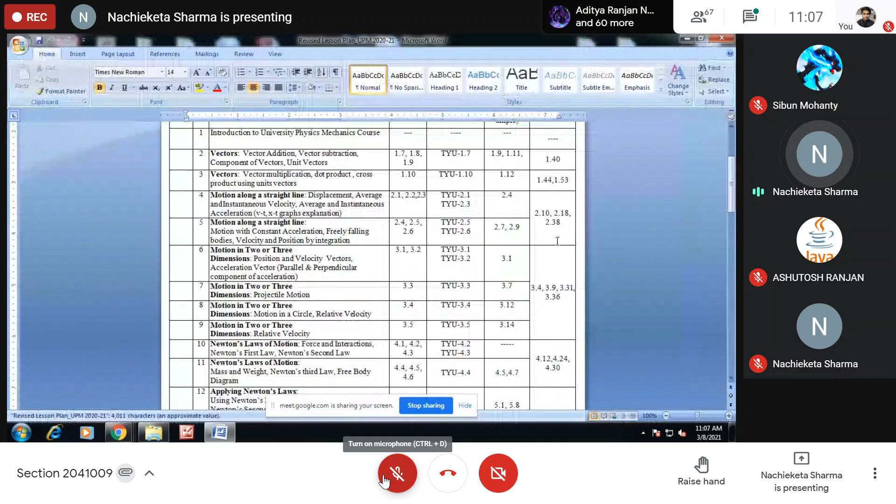Sir, we were at rotation of rigid body and doing a cylinder problem. Which cylinder problem? Example 9.8, sir, chapter 9. So we are still in 9.8. Just wait, let me see what is there in this chapter. This is a revised lesson plan, but this plan has again been revised. 9.8 we have covered. Then 9.11, 9.40, 9.59 are assignment exercises. So I think chapter 9 is over and we can start from chapter 10. Is it okay?

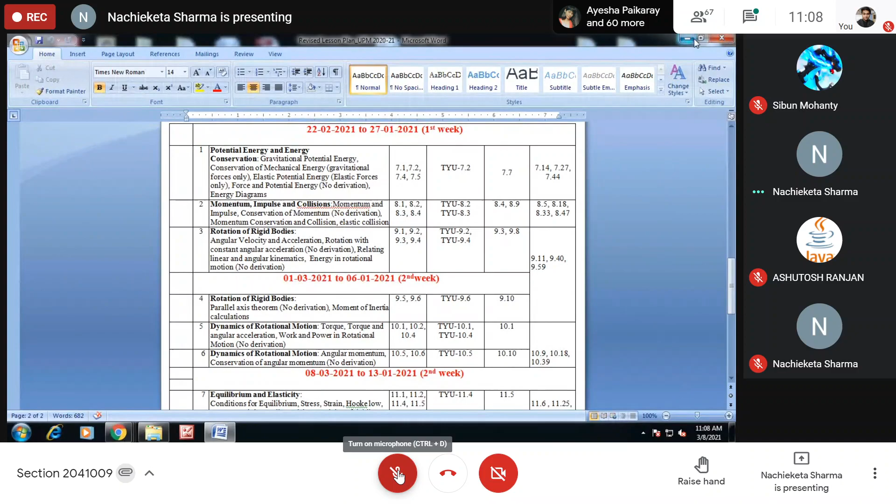Am I audible? Yes, sir. Okay. So we will start from chapter 10. Straight away we will do the problems, that will be better. So first let me do example 10.1.

Chapters 10, 11, 12, 13, 14, 15. But the 11th chapter will hardly take 10 minutes, a very small chapter. 13 is a big chapter; otherwise all chapters are very small, and they have truncated many parts. So you need not worry about all these assignment exercise solutions. And most important, the examination pattern is MCQ type, so there will not be any problem. So example 10.1, let us start immediately so that we can go quickly.

Example 10.1. I am reading out the question. How are you going to find the torque? Torque is responsible for rotation of a body. There is some kind of piston like this that can rotate from here. This point is normally known as the fulcrum, or a hinge, and this is your horizontal. With the horizontal it makes an angle of 19 degrees, and the length from this point to this point is 0.80 meter.

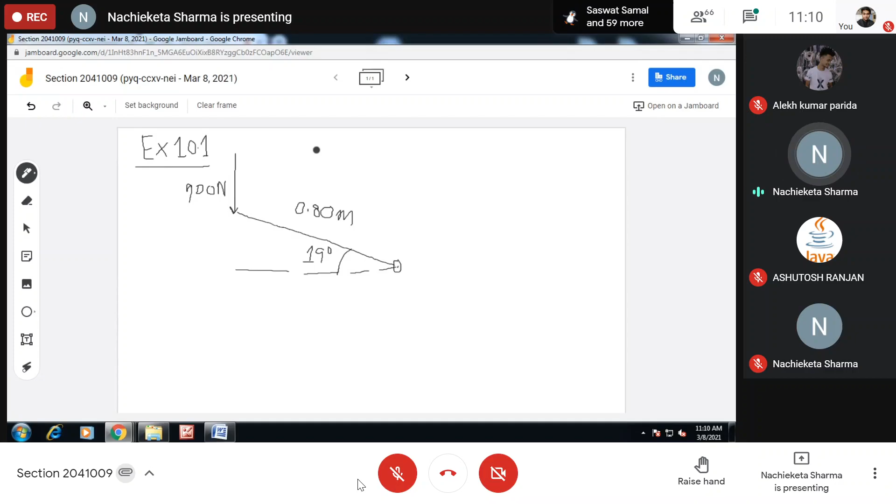Torque is a vector quantity. It is represented by a Greek symbol which is pronounced as tau. So this tau is equal to R cross F. How are you going to find out this R cross F? That means it has a magnitude and it has a direction. The direction is governed by the right hand thumb rule, as it is governed by the cross product of two vectors.

And its magnitude is tau equal to RF sine phi. R is the magnitude of the position vector, F is the magnitude of the force, and sine of the angle between vector R and vector F. So this angle is phi. I am writing it like this. So now how to find out phi? That is a very important task.

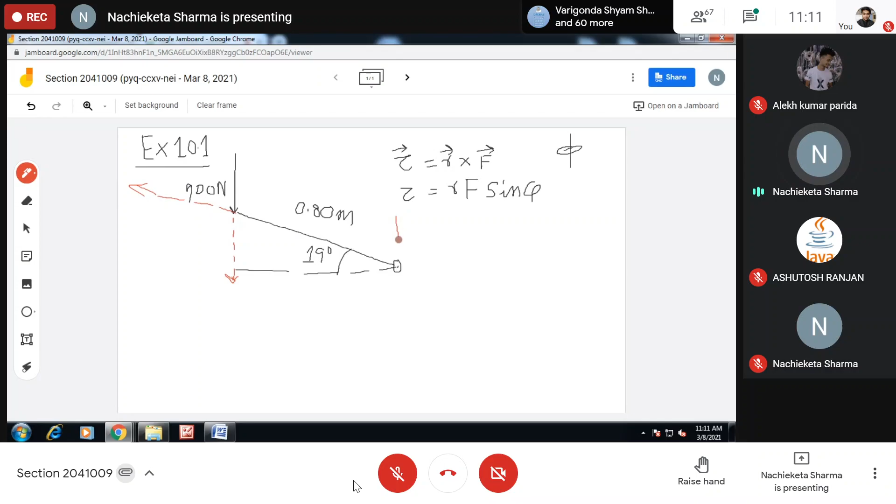So what you are going to do, you just extend this line of force in this direction, and you can extend this R in this direction. So this becomes the direction of R. This becomes the direction of your F, and you can choose your origin here as the fulcrum. So this becomes your x-axis, this becomes your y-axis, and the fulcrum becomes your origin O. Now you see this angle is your phi. So 19 degree is not your phi.

So phi will be how much? This angle is 90 degree. So this angle will be 71 degree. So 180 degree minus 71 degree is 109 degree. So this phi is equal to 109 degree. So how are you going to find out its magnitude? In place of R, you will write 0.8. So 0.8, I have written it as 8 by 10. Magnitude of F is 900 Newton.

So into 900, and then sine 109 degree is sine of 90 degree plus 19 degree, which is equal to cos 19 degree. So I will find out the value of cos 19 degree. If I do the mathematics, this zero gets cancelled, then 720 into cos 19 degree, which will give you a value of 680, and the unit is Newton meter, because sine phi doesn't have a unit. R is meter, F is Newton. So 680 Newton meter is the magnitude of your torque about this point, because once this point changes, the torque's magnitude will also change. This is one way of finding.

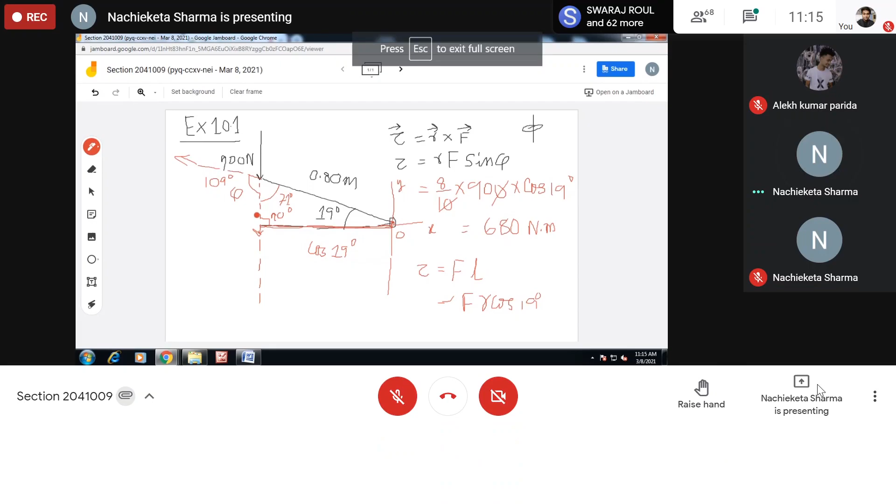So this is example 10.1. Now immediately we'll go to another. If you have understood this example, then immediately we can do a test your understanding, and I will test whether you have understood it or not just by drawing a diagram. These will be asked as multiple choice type questions, because these are small questions and have the potential... Test your understanding 10.1.

So test your understanding 10.1. So what is 10.1? Again, there is a kind of thing like this. This is the point of rotation. This angle is again given with the horizontal, which is theta, and this length from this fulcrum or point of rotation to the point of application of the force is L, and this value is P. This is capital P, the magnitude of the force, and this is the direction of the force, how it is applied. And you have to find out the magnitude of the torque.

Okay, and there are 4 options, and I will be reading out the options and you have to just tell me. So the figure shows a force P being applied to one end of a lever of length L. This length, as I mentioned, is L. What is the magnitude of the torque of this force about point A? This is point A. What are the options? A, PL sin theta. B, PL cos theta. C, PL tan theta. D, PL. Yes, tell me.

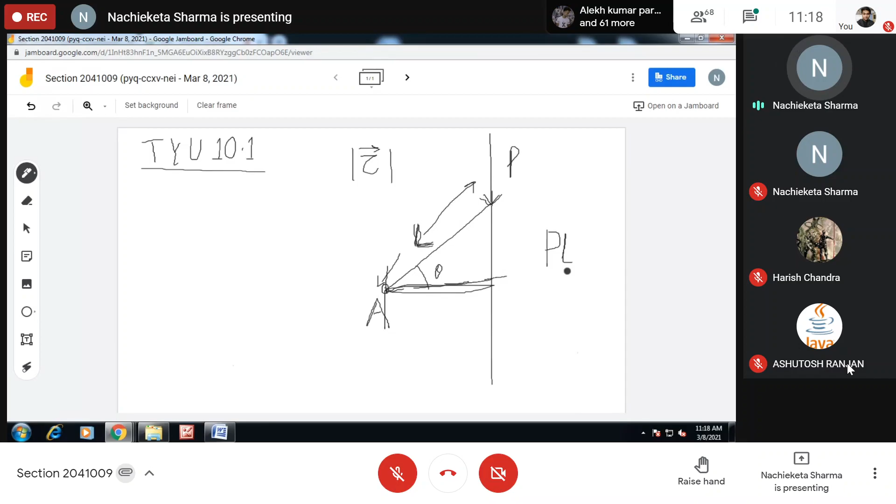Or you can also do it in a different way. You can extend this direction. So this becomes your phi, this angle, and this phi is nothing but 90 degree plus theta, and sine of 90 degree plus theta is cos theta. So again you get PL cos theta. In whatever way you do it, you will find the same magnitude. So you are correct. So that is test your understanding 10.1.

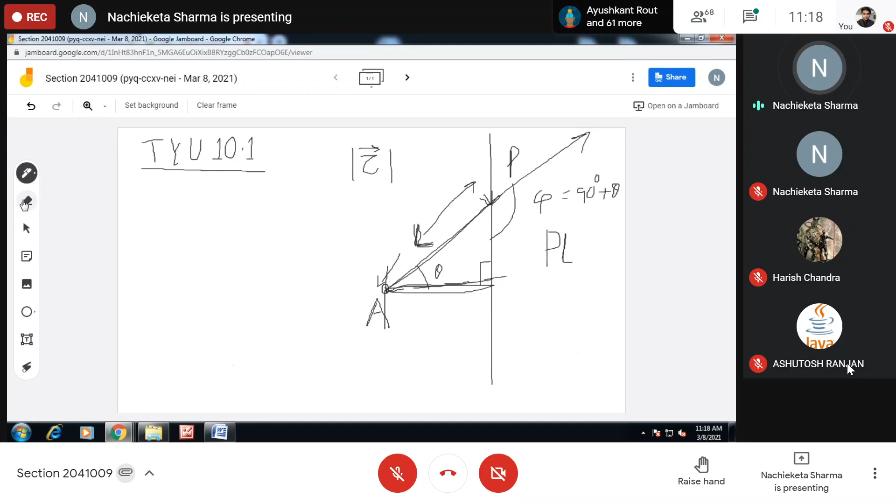Okay, now we'll go to another example, which will also explain another concept. Once I do it, you can understand. That is example 10.5. So you just look at the things. Just wait. Example 10.5, let me draw the diagram first.

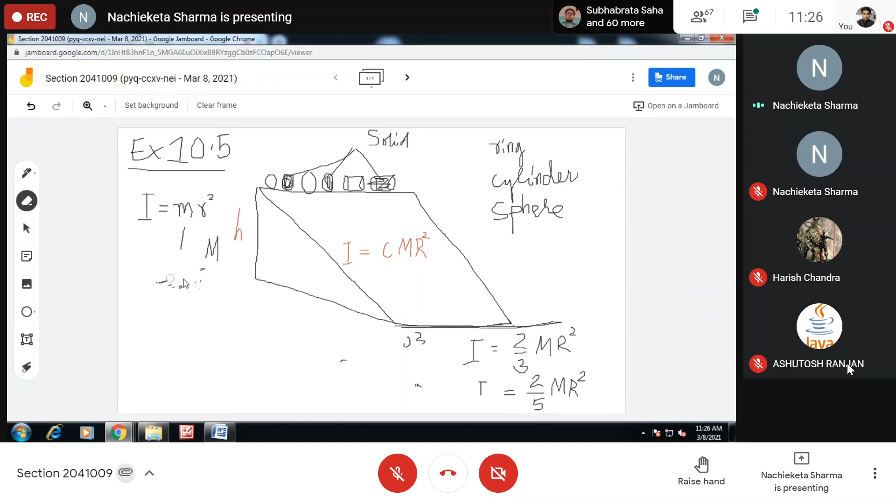Can you guess and tell me, so that we will test whether your guess is right or wrong? Now tell me, did you listen to the question, what I was telling? Yes, anybody, Ashutosh or anyone? Sir, all solid cylinders have the same shape. No, my point is that, can you guess which object will reach the ground? Your guess may be wrong or right, that is not important, but what is running in your mind?

If you have, of course, not seen the book and the answer. If you have seen the book or the answers, then you have missed that freshness, because I will not be impressed by your answer. If you give a right answer, I will be very much impressed, and if you give a wrong answer, I will be disappointed. Not like that. My point is that that sense of adventure will be lost if you have earlier seen the book. That is very important. So you should be fresh in your mind, and you can guess. If you have guessed it correctly, fine, why you have guessed it.

So can you say which object out of all these 6 objects will touch the ground earliest? Your answer should be number 1, you don't know. Let us discuss a little bit further, and then again I will ask you the question. So when I ask you such a question, your answer should be, I do not know. So that's better. Then we will discuss. Now tell me, when all these 6 objects fall down and start their motion, what type of motions will each of them possess?

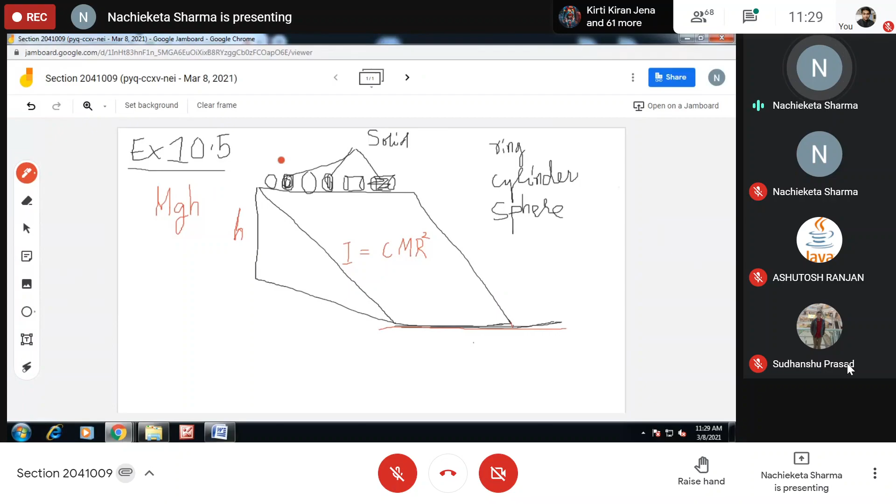Rotation will not take a body from one point to another point. That you must understand. Because rotation happens at a fixed point either about a fixed axis or the axis may change. But where the object is coming from a point 1 to a point 2, not due to rotation, but due to translation. Translation can take a body from one point to another point.

But rotation always is responsible for rotating the body at a fixed location, either about a fixed axis or the axis can also change. So rotation is not responsible for taking the object from one point to second point, rather translation. Is it clear? Yes, sir. Okay. Now the third question.

So out of the mgh amount of energy, that body is intelligent who will spend less amount of energy in rotational kinetic energy and more amount of energy it will keep for its translation. Because the body which will keep more translational energy for itself and only spend least amount of energy in rotation, that body will reach the ground earliest. Is it clear? Is it okay?

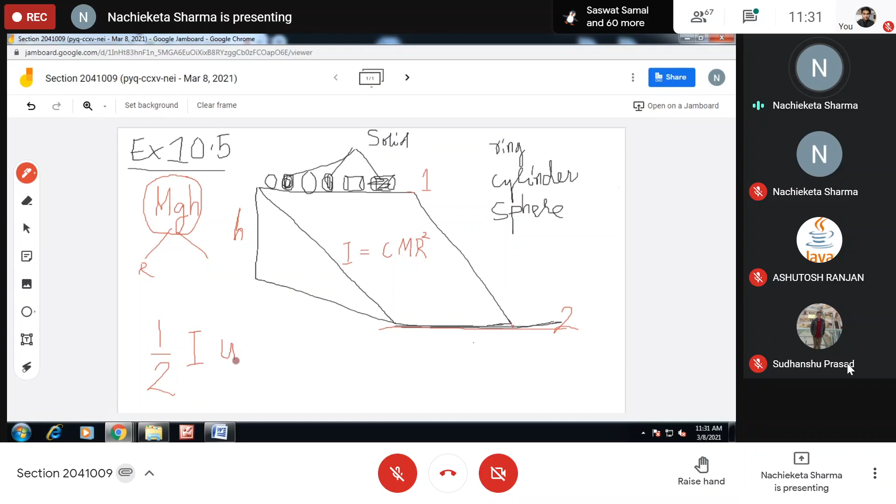Yes, sir. The next question is, which body will spend least amount of rotational kinetic energy? Rotational kinetic energy formula is half I omega square. Each of them will be rotating with the same angular speed. So ultimately, rotational kinetic energy will depend upon the moment of inertia. So a body which possesses least moment of inertia will spend least energy as rotational kinetic energy and keep more for translational kinetic energy.

So whose I is least out of all these 6 bodies? Solid sphere. Solid sphere moment of inertia is 2/5, which is 0.4, because you have got 0.4, 0.5, 0.7 and 1. So 0.4 is the least. So the rotational kinetic energy the solid sphere will spend is only half into 0.4 omega square.

That means more amount of energy the solid sphere has kept for translational kinetic energy. So naturally, the solid sphere will reach the ground earliest. So that object is intelligent which spends least energy for rotation and keeps more for translation. Now I will do the mathematics. 1 minute, because this is most important. That's why I have discussed all these things.

Have you got any question? Yes, sir. Why omega will be constant? Why omega will be constant? Because each of them will start with 0, and the torque that is being applied is same. Because the mass is same, mg will be the force, will be same, so same torque is being applied. That's why the angular speed will also be same. Okay.

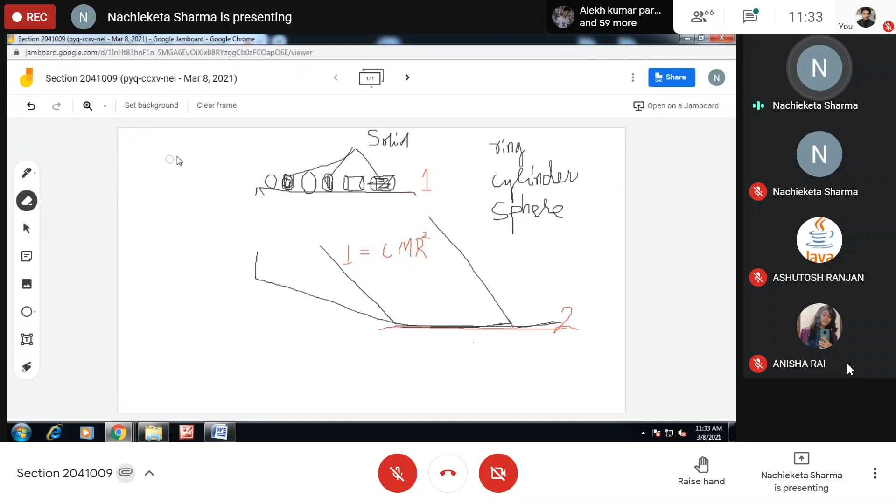Did you understand? If not, I will tell you in another way: there is no external torque applied on this body, it is 0. So it will have conservation of angular momentum, which we will discuss a little bit later. So I1 omega 1 is equal to I2 omega 2. Okay.

I2 omega 2. So this initial angular speed is 0. So the final will be how much? Just wait. So your question was why omega will be same for them. Let us do a little bit of mathematics. Probably this omega will not come into picture. Let us see. Who has asked that question?

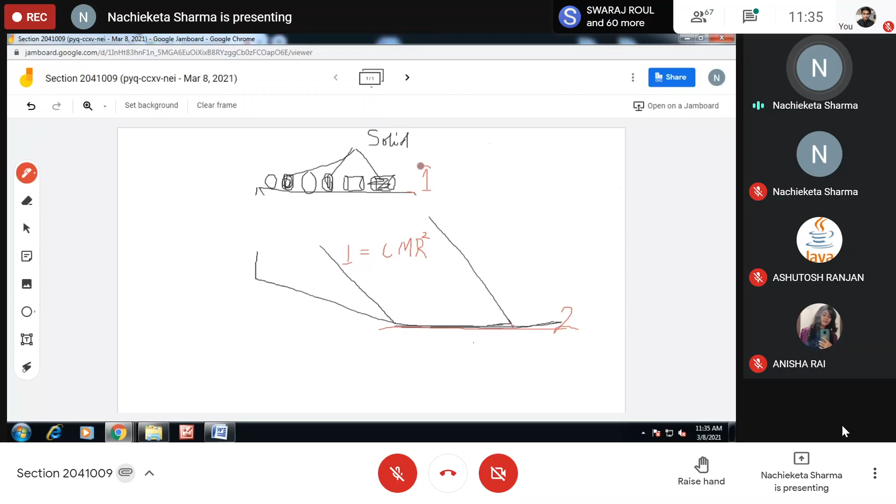So now you see the total energy is conserved. This is the initial point I have mentioned as 1. When all of them reach the ground, I have mentioned it as 2. So now I will write E1 is equal to E2. E1 is the total mechanical energy, which is K1 plus U1. U1 is the gravitational potential energy, and that is equal to K2 plus U2. K2 is the final kinetic energy, and U2 is the final potential energy.

All of them are initially at rest. So K1 is equal to 0. This part is 0. And all of them will come to the ground, so their potential energy will be 0. So U2 will be 0. So finally, you will get the conservation of energy as U1 is equal to K2. So what is U1? U1 is mgh, isn't it? And what is K2?

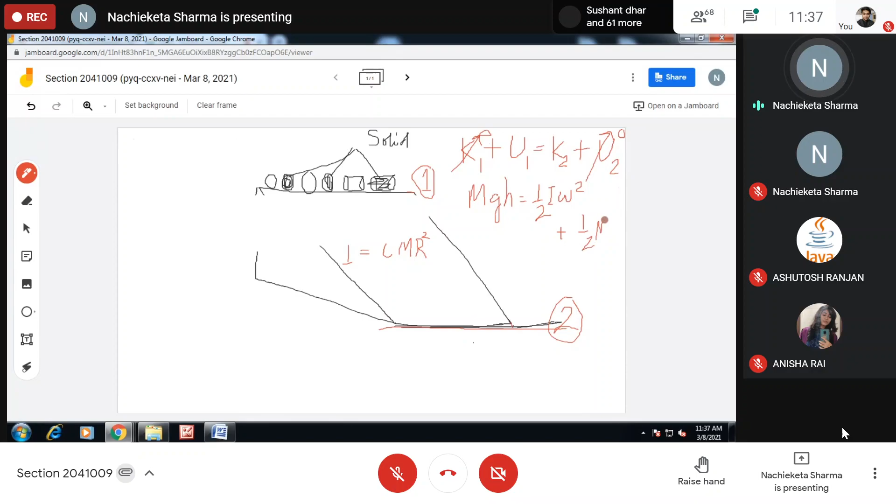K2, now you have two parts. One is half I omega square, and the second is half mv square. Half mv square is translational kinetic energy, and half I omega square is rotational kinetic energy. Okay, so now what will happen? Just wait. So half I omega square, I am writing it as half, in place of I, c mr square. C is a constant which can take different values for different shapes.

So half c mr square, and in place of omega, because VCM is equal to R omega, VCM, velocity of center of mass, is equal to R omega, I can write my omega as VCM by R. So omega square is VCM square by R square. So R square gets cancelled. So you get half c M VCM square plus the other half M VCM square, because the translation of the whole object is equivalent to the translation of the center of mass. If you take it as a point particle, then the center of mass will represent the whole body.

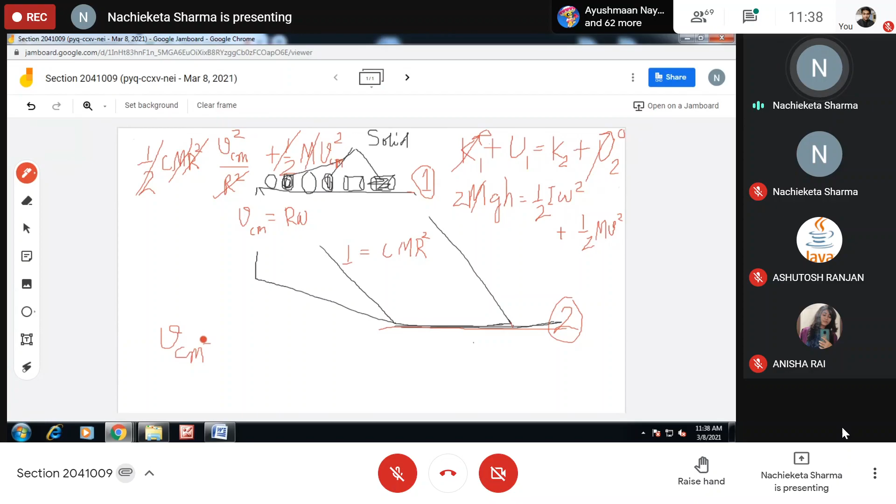Now you see you have got M here, M here, and M here. So M can be cancelled. Multiply by 2. So now this becomes 2gh. This half will get cancelled. This half will also get cancelled. Now if you take VCM common, VCM will be equal to square root of 2gh divided by 1 plus c.

So in the translational motion, the mass and the angular speed are not coming into the picture. Ultimately, the linear velocity depends upon c. The denominator will be more if c is more, and VCM will be less. If c is less, the denominator 1 plus c will be less and VCM will be more. And c is the least for the solid sphere. So 1 plus c will have the smallest value and VCM will be highest for the solid sphere. So this is what the mathematics tells.

But Ashutosh, your question is still valid. I think I should spend some time and I will answer your question in the next class. Is it okay? Yes, sir. Okay, so this is how you can do the mathematics also.

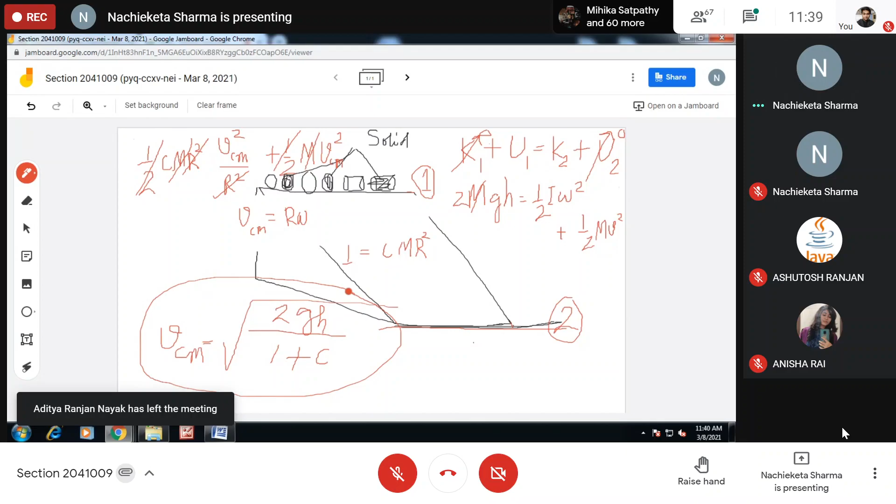Now this brings us to the next part of the question. Just wait. Have I got 10.1 and 10.10? Oh, now it has been reduced still further. So unnecessarily we did 10.5, but 10.5 is a very important discussion. Now they have reduced it, only 10.1 and 10.10 are there. So 10.5 is not there. Already I have done test your understanding 10.1 for you. Then immediately I am doing test your understanding 10.4, 10.5, and then I will do example 10.10 for you.

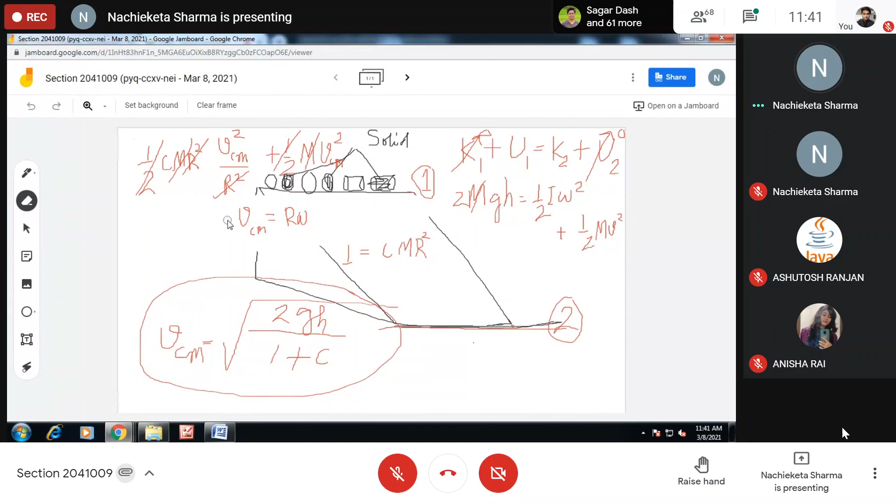So 10.4 test your understanding. What is 10.4? Yes, this is a very good question, and this will be asked in the MCQ. Very important questions. So let us discuss these questions. So what does this question say? Just wait. Why is my whiteboard? Okay. So let me, we have got 20 minutes and I have to finish all these test your understanding questions and the examples. In the discussion, a lot of physics will come, so you need not worry. Test your understanding 10.4.

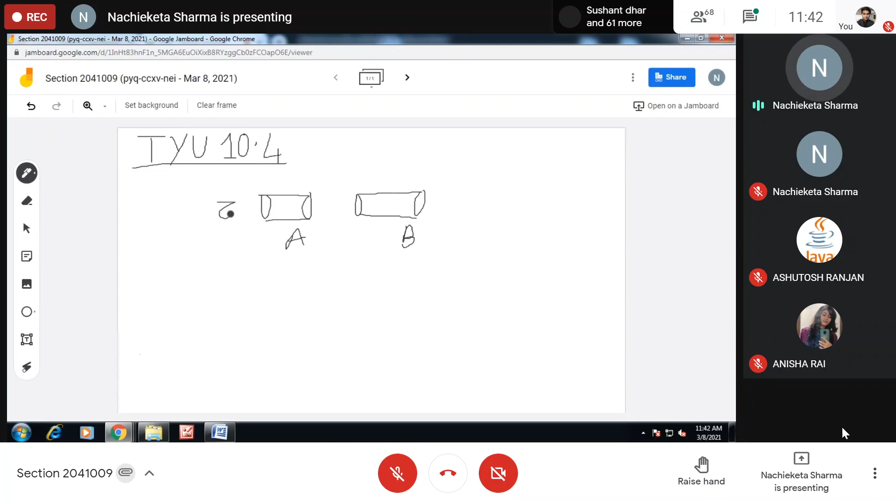Test your understanding 10.4. I am reading out the question. You apply equal torques to two different cylinders. You have got a cylinder A like this, and you have got a cylinder B like this. Okay. Suppose another cylinder which is known as B. Now you apply equal torques. That means you apply tau Z to this cylinder A, and also you apply the same torque tau

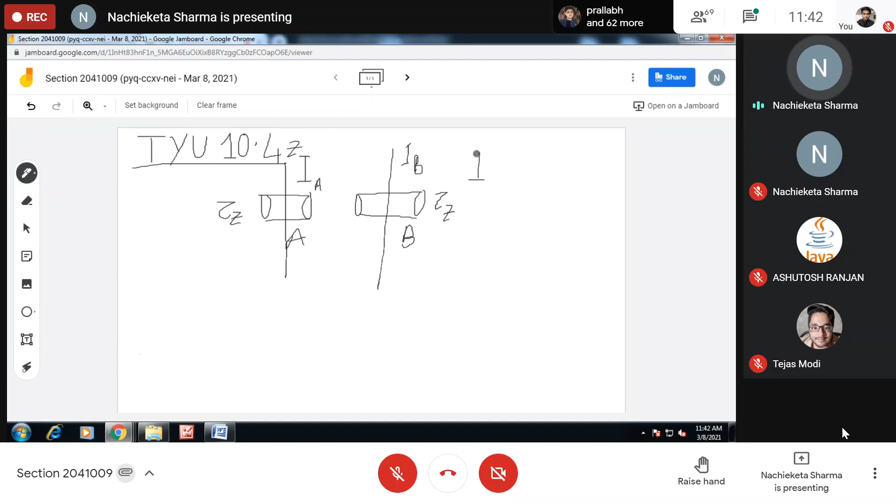Z to this cylinder. And the moment of inertia of this cylinder is IA about an axis passing through like this. This is your Z axis. Similarly, here also the moment of inertia about the same axis is IB. But there is a relationship. IA is equal to 2IB. The moment of inertia of cylinder A is twice the moment of inertia of cylinder B. Okay, now both of them were at rest.

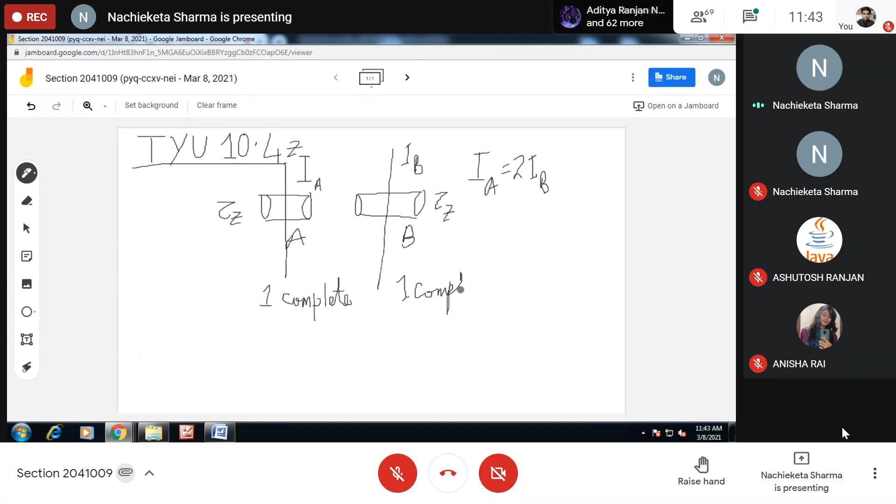Now what happens when you apply this torque, both of them rotate and each of them performs one complete rotation. This cylinder also performs one complete rotation. The other cylinder also performs one complete rotation. Now the question is, after one complete rotation, which cylinder has the greater kinetic energy?

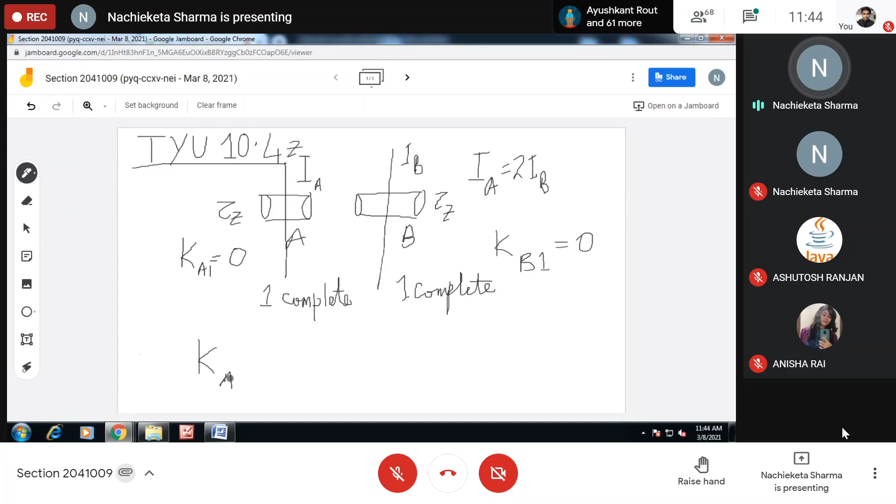Initial kinetic energy of cylinder A, Ka1, is equal to 0 because the cylinder is at rest. Similarly, Kb1, you can write. B is for the name of the cylinder, 1 is for initial kinetic energy. So Kb1 is also 0. Now the question asks you, what will be Ka2, cylinder A's final kinetic energy? How much will it be? And similarly, what will be the kinetic energy Kb2?

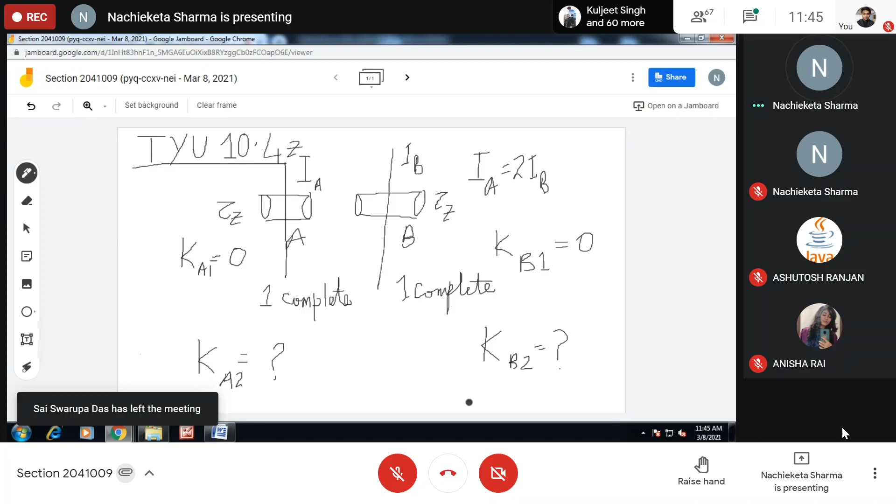Okay. Any guess? Quickly you guess and tell me. Which final kinetic energy will be more? Quickly say. Sir, one more. Yeah. I think same for both. Yes, please tell me quickly. Anybody can guess and tell me. Yes, if you have not seen the book, it is not easy to answer this question. That is very important because, can you guess?

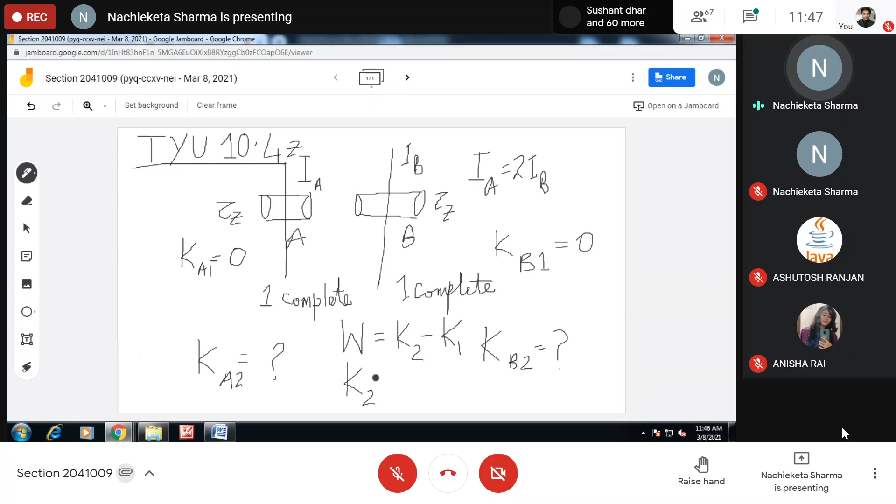As in translational motion, if your force is constant, you can find out the work done by multiplying the force with the displacement. Similarly, here also a constant torque is applied.

So you can, am I audible? I am audible, but probably you are not able to see my screen. Is it? Yes, sir. Here it is trying to reconnect. I have connected from my system and from my mobile. The mobile is not betraying me, but the system is putting me into trouble. It says no internet access. Anyway, I am explaining it. If you are not able to see the screen, I cannot do anything because it is trying to reconnect. But still I am connected to you through the mobile.

So if your torque is constant, and you have an angular displacement, then you can find out the work done in rotational motion as the product of torque and angular displacement.

What is the torque? Because in both the cases, you have applied the same torque, tau z. And what is the angular displacement? Both the cylinders have started from zero and they have completed one rotation. One rotation means how much degree? 360 degree or 2 pi radian. So your angular displacement is 2 pi radian, your torque is tau z. So in both the cases, the amount of work done is same, 2 pi tau z.